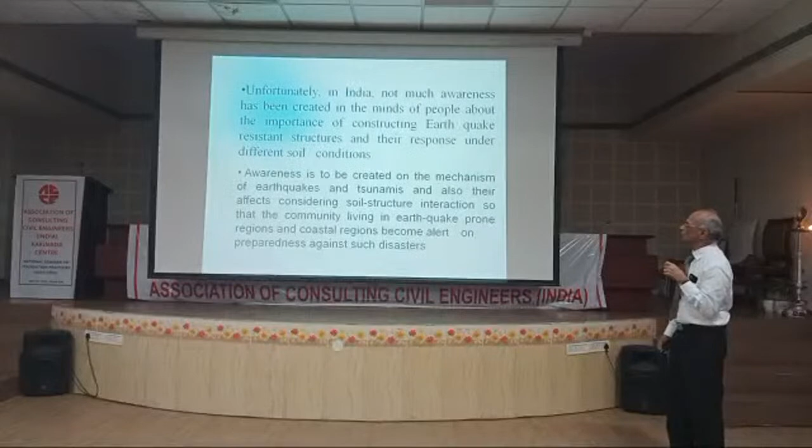Unfortunately, in India, not much awareness has been created among the minds of people regarding earthquake-resistant design, particularly for high-rise structures and important structures like school buildings, hospital buildings, reservoirs, dams, and flyovers. We have to consider these aspects also, and awareness is to be created on the mechanism of earthquakes.

Do you know, in Japan even school children know how to protect themselves during an earthquake - they go underneath a table automatically. That type of education is to be created among the people and public through seminars and workshops of this kind, so that the community living in earthquake-prone and coastal regions becomes alert and prepared against such disasters.

Probably you must be knowing we are in zone 3 - I will show the different zones of India also. Particularly our AP state, up to Visakhapatnam from Chennai, is in zone 3.

So quickly, what are the natural hazards - earthquakes, tornadoes, cyclones, and floods. Floods is another very important one. And fire, volcanoes, and landslides will happen, because during earthquakes there are coastal storms and tsunamis. Tsunami is a very dangerous natural hazard, and hurricanes - USA and other countries are facing these hurricanes.

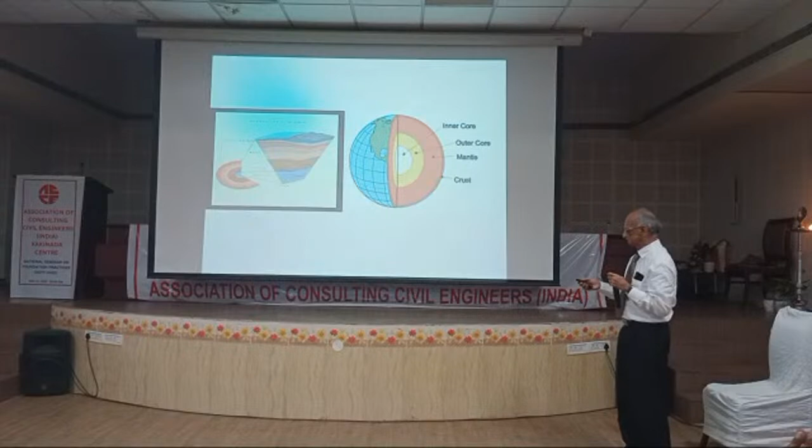So plate tectonic theory - this is very important. This is the reason for earthquakes and tsunamis. Plate tectonic means the earth has split into a number of plates. Number of plates, I will show you. And it's a fact also, you can see it in the Atlas also. Therefore, this plate tectonic theory explains several aspects of earthquake occurrences.

And this theory assumes that the outer shell can be divided into a number of rigid plates - the crust part has divided into a number of plates, I will show you that also. 225 million years ago, the Earth was a single mass known as Pangaea. Then 200 million years ago, it split into two parts - Gondwana and Laurasia. And the present day configuration is like South Europe, South America, North America, like that. So in future, the Earth will go on changing because it is splitting.

Normally, earthquake focus will be about 30 to 40 kilometers below the surface, and seismic waves travel. That's why I have taken the soil structure interaction. First, these seismic waves strike the foundation, then when they reach the ground, the earthquake interaction in particular is very important when you design against earthquakes or lateral forces like wind.

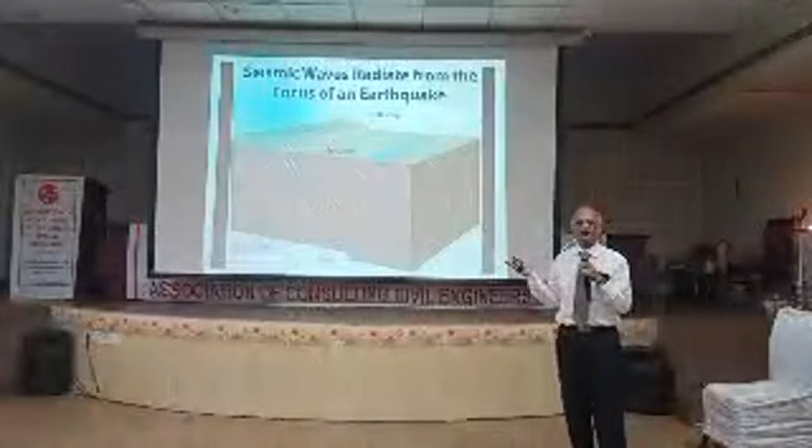So this is in fact the epicenter, magnitude, and also the source.

Now here the principle of modes of failure: normally for a shear wall, any wall, or even a frame, there are three types of modes. One is sliding, due to friction, the next is rocking, which means it rocks like this about the x-axis or z-axis, and bending, where the wall can bend.

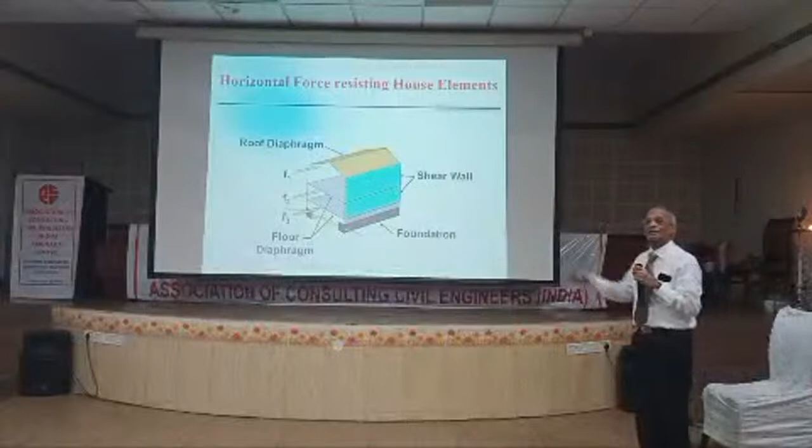Then normally which elements of the structure will be designed for lateral loads, wind or earthquake? Suppose the wind direction is like this, therefore the slab, the foundation, and the shear walls matter. That's why shear walls are parallel to the direction of the earthquake force or wind force.

And this is about earthquake philosophy. In earthquake classification, slight means up to magnitude 4.9, and many times we are facing minor earthquakes only. Recently in Ongole, Vijayawada also got 3 or something like this, a number of times. The moderate earthquake is 5.0 to 6.9, great earthquake is 7 to 7.9. India has faced a number of great earthquakes, particularly in North India, and very great earthquakes are above magnitude 8.

These are the IS codes related to particular seismic zones: IS 1893, latest code 2016, 4326, 13827, and 13920. Very very important codes for structural engineers. It explains about ductility effect, and IS 13935 deals with repairs and strengthening.

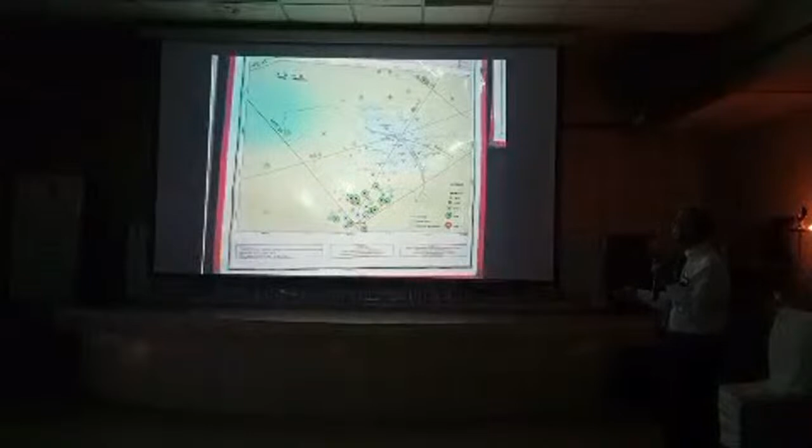Now, in fact, we have one research center at Gudlavalleru. By taking satellite imageries from NASA and from NRSA Hyderabad, we have developed some maps for the Krishna district and also Guntur district. At that time this area was announced as Amaravati, our capital area. We have studied that an earthquake of almost 3 to 4 magnitude occurred here a number of times.

Some minor cracks are also there. Cracks are there throughout India, and the majority of cracks are in northern India. There is also one important crack from Maharashtra to Ongole. That's why many minor earthquakes have occurred in this region.

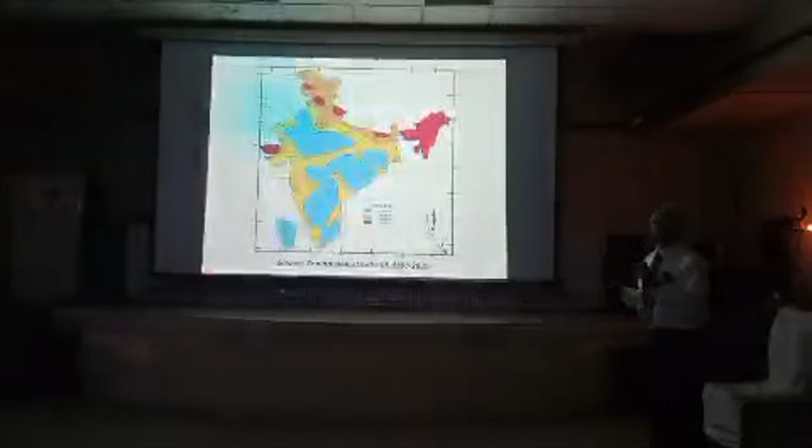In fact, I made a research survey for Hyderabad city. That also I will show you. So this is to understand...

...the seismic zones. The complete northern Himalaya range is zone 4 or zone 5, a very severe zone, and blue indicates zone 2, and particularly our AP is zone 3. As I said already, in IS code these maps are available, and you have to design the structures according to the zone in which the structure is located.

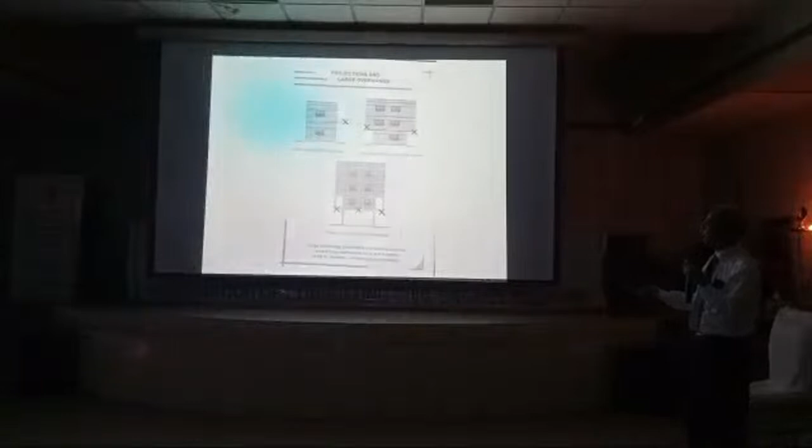So here also you can make a joint. These are all available in literature. Same thing - if you provide a balcony with openings, it is also prone to not just collapse or failure during lateral loads, but during earthquakes.

Now I come directly to soil structure interaction. Structure failures occur when not considering the soil structure interaction effect, structures which are not designed for soil structure interaction. Then I will take up a case study of Hyderabad.

Coming to soil structure interaction, there is a very important relation between structural engineer and geotechnical engineer. Without them, you cannot design any structure. Normally, the structural engineer is bothered about the structural configuration, allowable bearing capacity, its eccentric nature, and the foundation. That's what a structural engineer normally does.

Coming to geotechnical engineering, he will focus on inherent soil characteristics like C value, phi value, and N C, N Q, N gamma, their bearing capacity constants. And recommending the type of foundation, whether it is isolated, raft, or pile. So that is almost the duty of the structural and geotechnical engineer.

But here the dynamic relationship is where the response of soil influences the motion of structure, due to vertical loads or due to lateral loads. This relation always exists. Soil influences the motion of structure, and the response of structure influences the motion of the soil. This is a very important concept, called soil structure interaction. This is the definition of soil structure interaction.

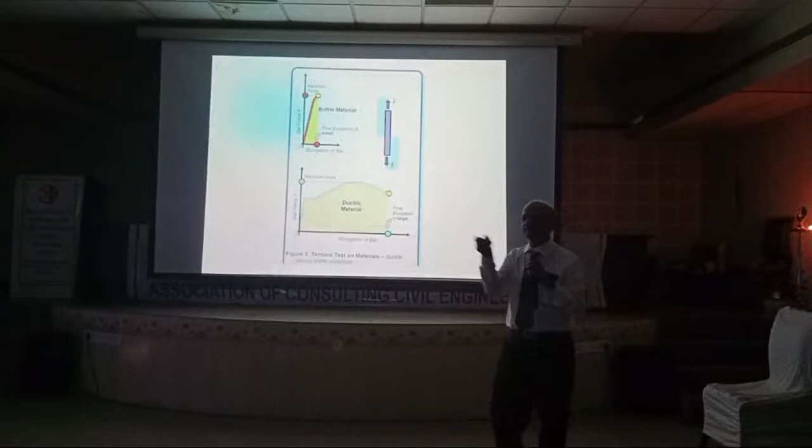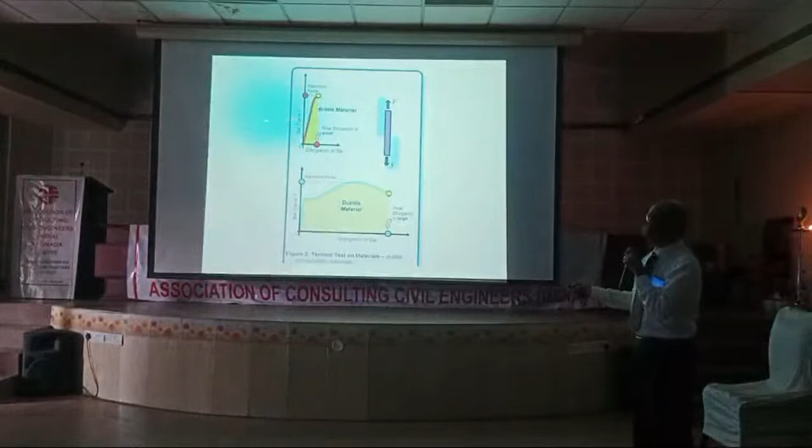So this is the force elongation curve. This is the force. Of course, the force may be large, but the deflections are very less in case of concrete or brick, which are nothing but brittle materials.

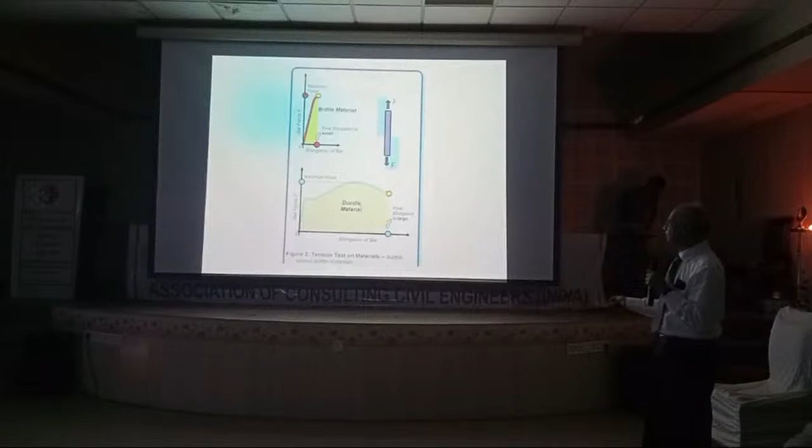Whereas if you take a steel rod, when you test it, it takes a long time, and a lot of elongation will occur before it fails. So it gives warning also. A brittle material never gives warning, it fails all of a sudden.

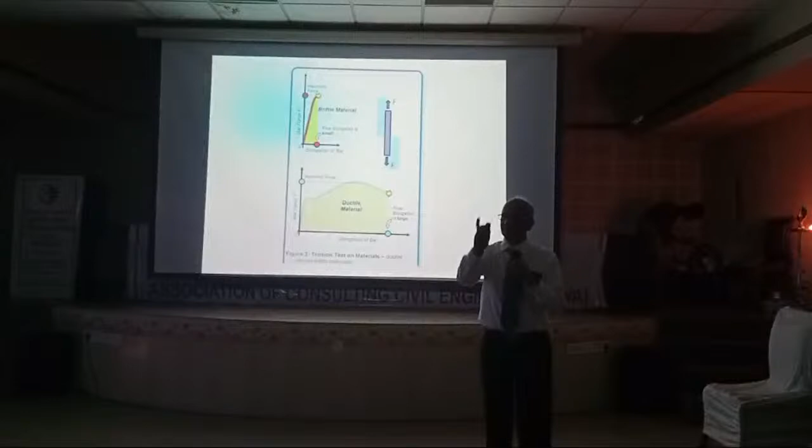That's why, particularly during lateral loads like earthquake or wind, you make the structure ductile in nature. It vibrates, but it will not collapse. If you don't maintain the joints, it lacks ductile nature. IS 13920 gives guidance on how to make a joint ductile. So this is a very, very important factor for the design.

Normally, high frequencies about 10 Hz and greater are dominant on rock or stiff soils. Higher frequency means more oscillations, and stiff soil means it oscillates more, so the time period is less. If it is on loose soil, displacements are very high and frequency is less, so below 5 Hz for loose soil.

The behavior of foundation on soil is modeled by foundation impedances, a very interesting phenomenon. We can adopt some springs, calculated by different equations presented by various authors, with spring constants and other parameters, making the structure a mass-spring-dashpot system. You can calculate the displacement, shears, moments, everything. These are soil springs for horizontal and vertical motion, and also torsion. I will show you some data.

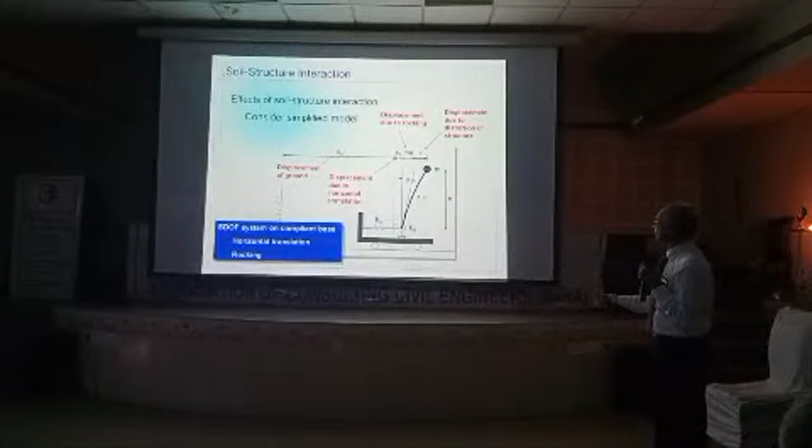This is a very interesting figure. Look here. During an earthquake, for example, this is the structure. First, the structure will shift - that is called free field motion, where the field itself shifts, called UG, the displacement of ground directly. This is the horizontal spring which gives horizontal displacement. Another is rocking displacement, and displacement due to the structure itself, which is called distortion of the structure. So you can see the total displacement of the structure.

So we consider soil structure interaction - in reality it happens like this. But what we often do is treat the structure as fixed to the base. Of course, for that condition also some displacements will be there. But during earthquake or wind, the displacements are very high, particularly for loose soils. This is only a single degree of freedom system. If it is a multi-story building, it becomes a multi-degree freedom system.

So we skip this. Yes, IS 1893 covers structures resting on flexible soil - it is mandatory even for field engineers because they have to follow IS codes.

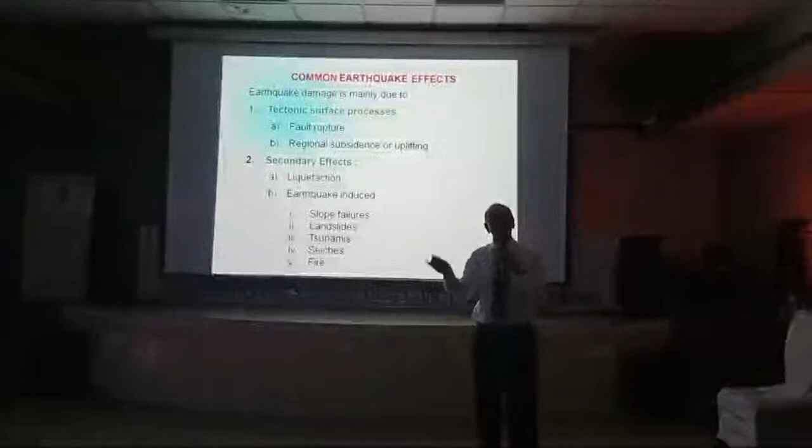Now, structure failures for not considering this - as I told you, let me quickly go through different cases. Particularly during earthquake, fault rupture occurs. Fault rupture during earthquake means some part of the earth will crack for some kilometers. They have almost gone into the soil, disappeared, as happened in Alaska during an earthquake.

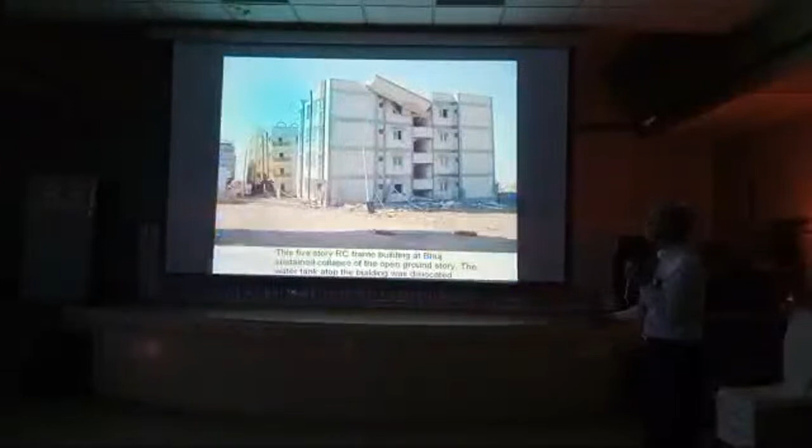This is again from a Gujarat earthquake example. A 5-story RC frame - how many stories are you looking at? Only 4. What about the 5th story? That is the car parking, and it has gone down. We have witnessed a number of such happenings in Hyderabad and in Kakinada also, and some other places. At Vijayawada, one water tank has fallen. So soil structure interaction has a lot of importance.

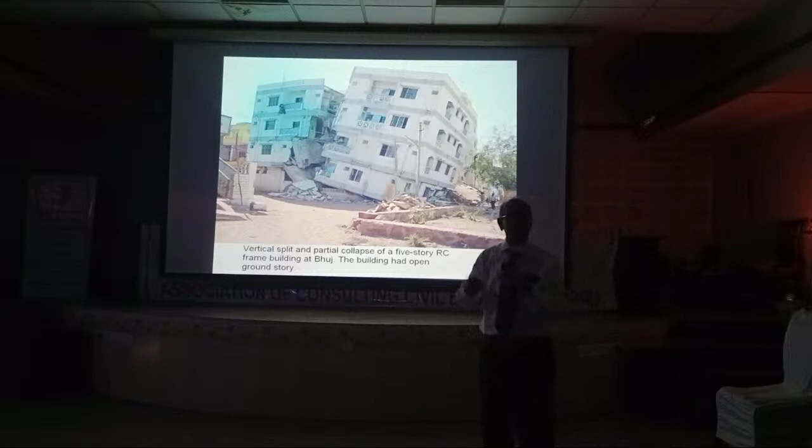This is pounding - side by side, they construct buildings violating municipality rules or so. Let me explain this simple thing for at least 2 to 3 minutes.

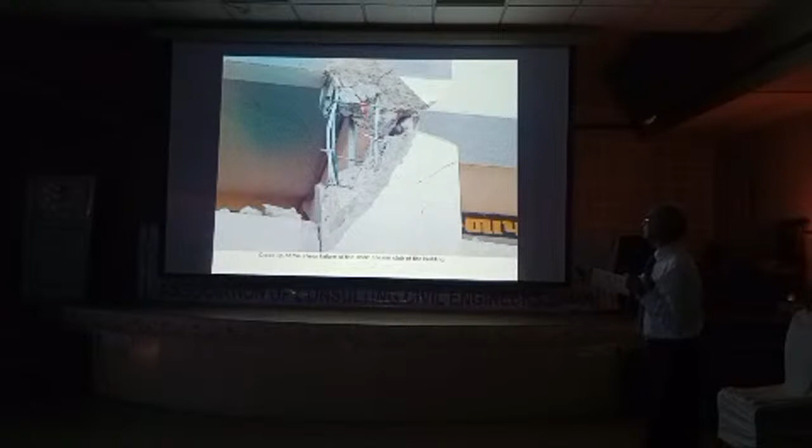Now during an earthquake, one tie has broken. See, this tie, how much cost would it be? One tie, 6mm or 8mm rod, maybe 100 rupees. But because of this, the entire structure has collapsed. Therefore, due to lateral loads, the columns act as beams - lateral load means they act as beams. Therefore, these ties become stirrups. Normally, we call stirrups in beams for flexure or shear. Now, columns will also take shear during lateral loads. Therefore, it has broken. What will happen? The spacing becomes double, and when it becomes double, buckling has taken place.

So, a number of buildings in Ahmedabad failed because of this. Therefore, columns in the cellar floor in particular, we should be very careful. At least for every 10 centimeters, we have to provide stirrups. See, buckling of longitudinal bars happens because of this buckling.

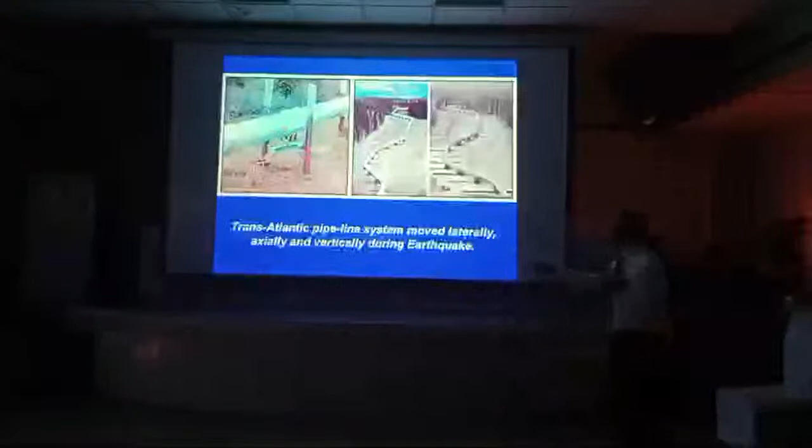This is the Trans-Atlantic pipeline, very important, like the ONGC pipeline. If the joint fails, what will happen? A lot of actions will take place. The original pipe displays effects not only horizontally but also vertically. So jointing the pipelines is also very important.

Now you can see the flyover bridge, how it has collapsed. You can see it has fallen totally. This happened between the Philippine plate and the Eurasian plate.

Such videos, a number of them, are with me, but due to lack of time, now a case study on responsive structures concerning SSI. This is the theoretical study, and I also explained some equations which are available now to calculate the displacements, shears, and moments.

Major metropolitan cities in the world have registered enormous growth in population. Most of the people are migrating to cities, all of you know, right? One of such cities is earlier Hyderabad, now it is Vizag, Kakinada, and the like. Unfortunately, in developing countries, not much awareness has been created in the minds of people about the importance of constructing earthquake-resistant or tsunami-resistant structures. The main objective of our study is to ascertain various aspects of terrain associated with urban environment and to consider these aspects in dynamic analysis.

Suppose you take Kakinada city. First, you have to make a survey and develop a soil map showing where loose soils are, where rocky soils are, where gravelly soils are, because there are so many types of soils. So first you develop a city map, which is also known as microzonation. This is very important because the structure designed in a rocky area is totally different from a similar structure on soil.

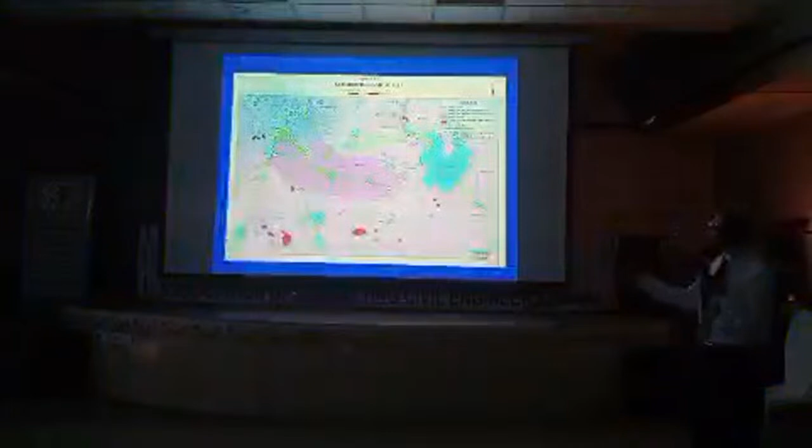So this is the geomorphology map, you can see. That means you take some satellite survey and identify the type of soil where you are going to build a major dam or building.

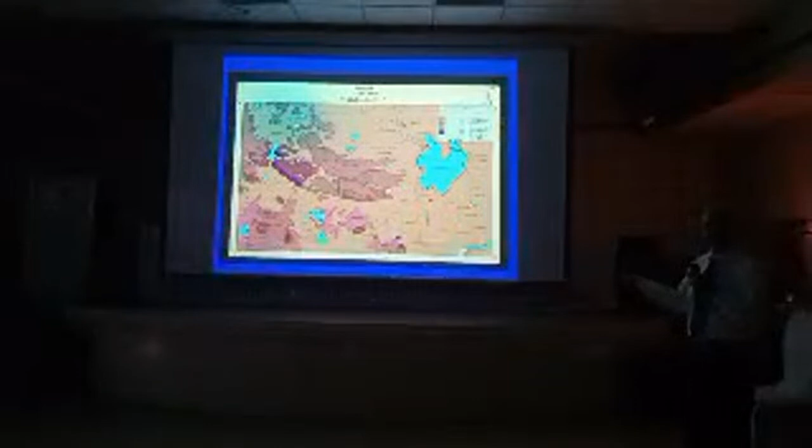So this is the slope map of the city, showing from top to bottom how to maintain the drainage system. Nowadays, what will happen? You start the drainage in one state, but in another state it is above that level, so such problems will arise. Therefore, you have to take the slope map of the city or town.

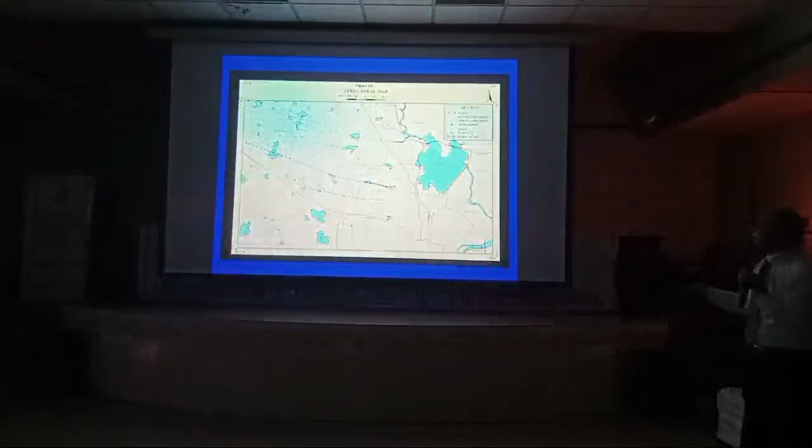So one can design only for dead loads and live loads like that. We have the frame, and using the Kani's method or stiffness method or software, we can calculate the moments and shears. But how do we consider the soil-structure interaction?

Now what I have done, I made it a single degree of freedom system. By philosophy, if it is in series, 1 by k equivalent equals 1 by k1 plus 1 by k2 plus 1 by k3, and so on, you get the equivalent stiffness. So I made it a single degree of freedom.

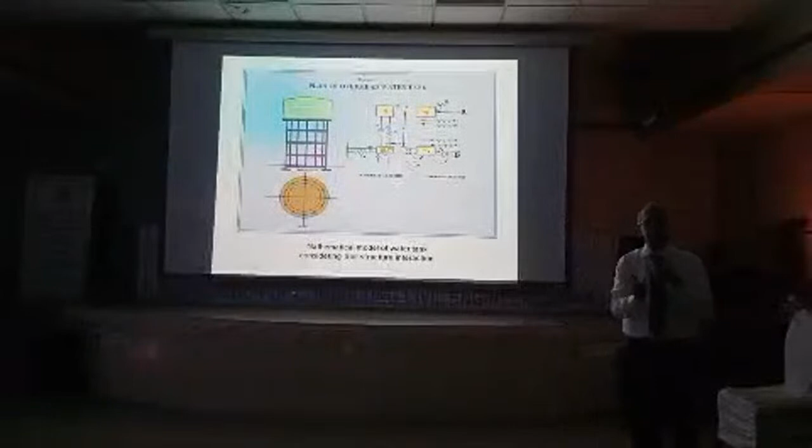So this is the water tank. I have already calculated the mass, top mass, and also stiffness of the structure. Now the soil is represented by springs: a horizontal spring to get horizontal displacement, and a rocking spring to get rocking displacement. And if torsionally there is no eccentricity, here it becomes a single degree of freedom system, and here it becomes a 3-degree system because there are 3 springs.

What is the degree of freedom? The number of possible displacements.

So how do we analyze it? This F is the inertia force - all of you know what inertia is, mass into acceleration. This is the damping force, C into x dot. This K into x is the restoring force due to the structure.

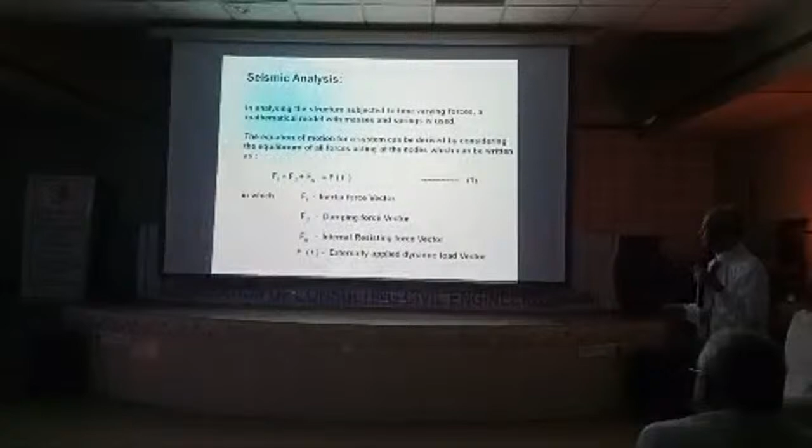Therefore, this is the matrix formulation. All of you know force equals mass into acceleration. Similarly, damping equals C into x dot - the research scholars and other faculty know this pretty well. And this K into x is the restoring force matrix. So in matrix form, we can write m x-double-dot plus C x-dot plus K x equal to external force, earthquake or wind, whatever. So you get the time period or frequency by putting it equal to 0.

So the time period you get without applying any external force. Any structure will have its own time period, its own frequencies, depending upon the stiffness and mass. Using this, you can calculate the time period, and keeping track of the time period is very important, particularly for lateral loads.

Now coming to soil structure interaction. Soil response depends upon soil properties like unit weight and shear wave velocity. Shear wave velocity is a very dangerous parameter. Normally in loose soils it is very low, and in rock it is very high. For example, in black cotton soil, its value is only 60 meters per second.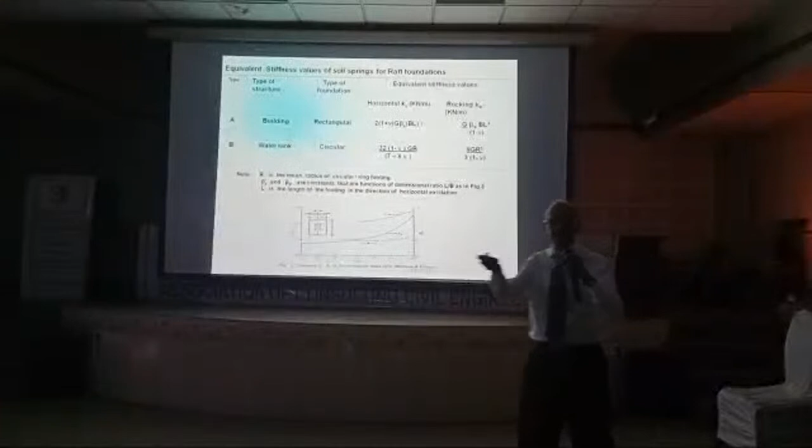Now this is very important. Suppose if the foundation is an isolated rectangular footing, this beta x we can obtain from this graph, and like that we calculated horizontal and rocking stiffness.

Now stiffness in case of piles - that is also translation, vertical displacement. These are the equations available. EP is the Young's modulus of pile concrete, area of cross section, R is the radius of the pile, and FV1 and FV2 are normal coefficients which are already available.

So these are the coefficients that are available - normal coefficients, depending upon Poisson's ratio and also E pile by G pile, that is Young's modulus by shear modulus value. You can pick up the appropriate value and get the stiffness of piles also in horizontal mode and rotary mode. These are the equations we can formulate.

Now the 3x3 matrix - I have formulated mass matrix, look here. This is acceleration, this is the stiffness matrix. So m times x double dot plus k times x equals 0, I get the frequencies. So I got the frequencies.

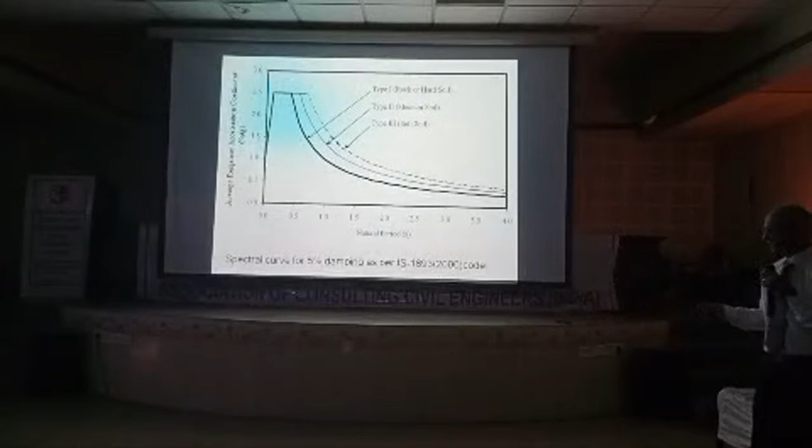Now this is the already available spectral curve depending upon the time period. I calculate the SA by G values from which I calculate the base shear directly. Using the free vibration analysis, I can calculate these results for the building as well as the water tank.

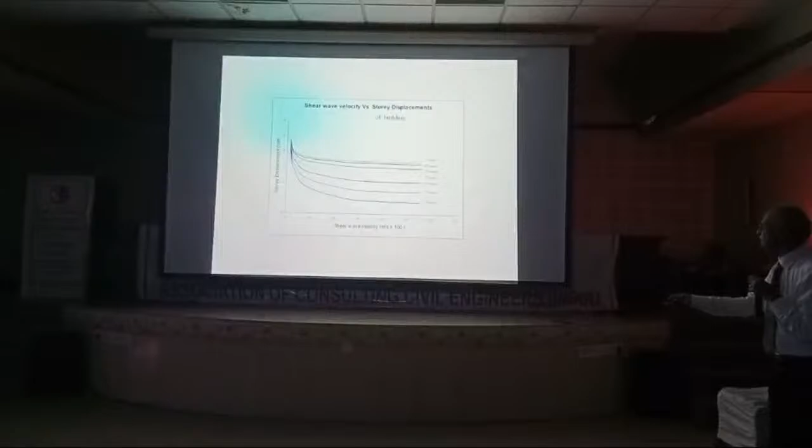I will show you the displacement - that is interesting. So story displacements, you can see depending upon the story, the displacements for different soils. In loose soils, the base shear transfers differently. So generally it is seen that the displacement values increase with the decrease of shear wave velocity. This is an important point I would like to highlight.

It is also observed that there is a wide variation and decrease of displacements from loose soil to hard soil. So in loose soil, both the structure as well as the water tank show very high displacements.

In spite of many scientific and technological advancements during the past 100 years, the threat of natural disasters, particularly earthquakes, tsunamis and wind storms, remains untamed. History, geological evidence and experience show that the rate of occurrence of these natural hazards will increase in future, as is well established globally. Earthquake-prone societies have to learn how to live with earthquakes.

Japanese people know how to live with earthquakes. We need to make society safer against seismic damage and construct buildings properly, particularly in coastal regions. Megacities, due to their sheer size and complexity and being situated in high seismic regions - for example Mumbai, Ahmedabad and New Delhi - are seismic regions. Therefore, unless we take care, we don't know what will happen in future.

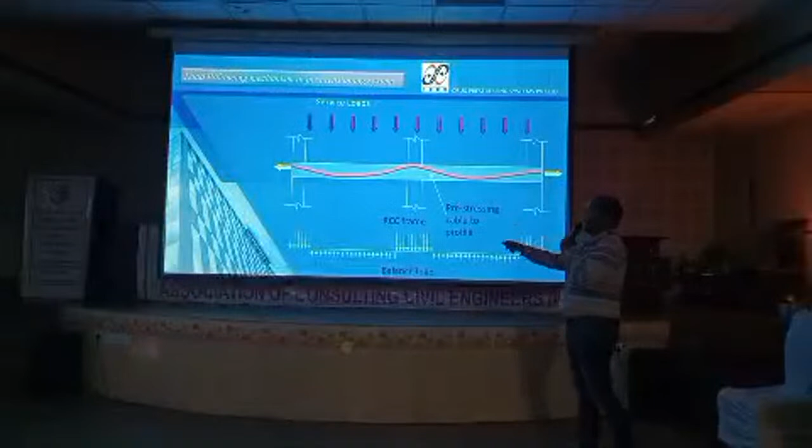In the post-tensioning system there are two methods: the bonded post-tensioning system and the unbonded post-tensioning system. Our organization works on the bonded post-tensioning system. In the bonded system, the pre-stressing reinforcement is completely bonded with the concrete through grout, whereas in the unbonded system, the pre-stressing reinforcement is not bonded with concrete. In the bonded system, the tendons are not free to move with respect to the concrete, whereas in the unbonded system, the post-tensioning tendons are permanently free to move relative to the concrete between the anchorages.

The merits of the bonded system over the unbonded system.

The bonded system critically does not depend on the anchorage after grouting is done, whereas in an unbonded system, the anchorage failing can cause issues. In unbonded systems, there is a chance of failure at the wedges, that is the end anchorage, and that damage we cannot find. Whereas in a bonded system, it is completely grouted with concrete, so even if the end anchorage fails, it is not a problem to the structure.

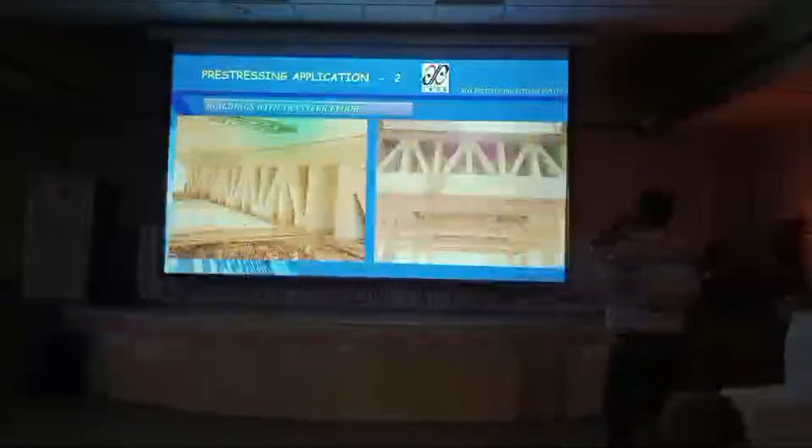These are the materials used in the bonded post-tensioning system: the strand and the tendon. Usually strands are available in 0.5 inch and 0.6 inch diameter. The strand is made up of 7 wires bundled in a strand form.

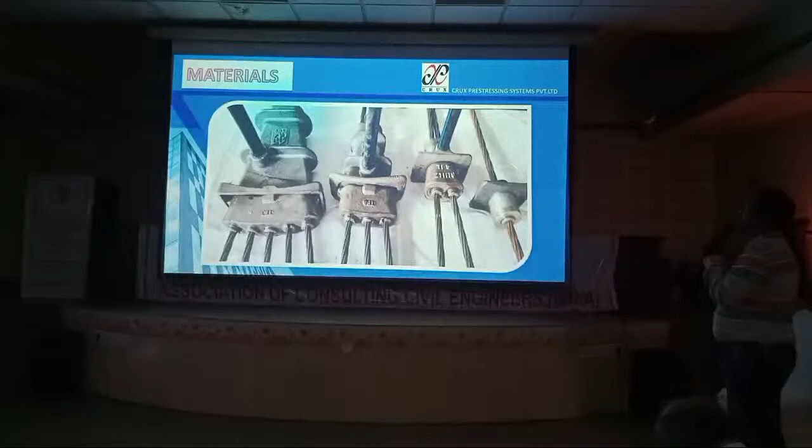There are different types of tendons. This one is a multi-strand tendon, used for higher strand counts and higher loading conditions, so we go for multi-strand tendon. This is a rounded duct used for the tendon. This is the monostrand stressing machine, used for stressing in the post-tensioning design.

The structural elements are thinner compared to the conventional system, which gives more head clearance to the structure and is also neat and simple. For spans higher than 10 meters, we have the beam-slab system with major beams and secondary beams, and if we go with centering and reinforcing everything, it will take more time.

Whereas for such spans, we can go for a flat slab system. It may be a flat plate system or a banded system. It is very simple, easy, and neat, and improves speed of construction. As discussed earlier, the structural element thicknesses are very less, and consumption of reinforcement and concrete is less compared to the conventional system, which increases the speed of construction.

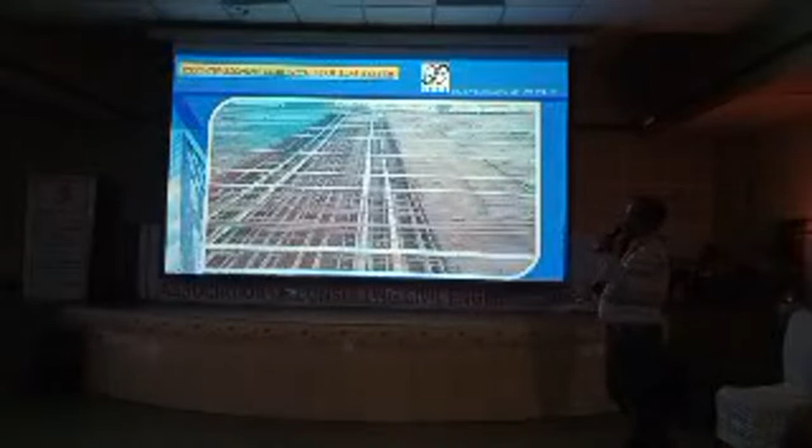This is a typical example for transfer floor, done at Vizag for the Abram project. This building is a mixed development where the first 3 floors are for commercial purpose and the next floors are for residential purpose. We floated the residential floor level, and this was done for 11 floors. We transferred the structure for 11 floors. These are some of the projects we have done from Crux.

This is a hotel floor. We floated this structure for 20 floors. The other commercial projects have no floating.

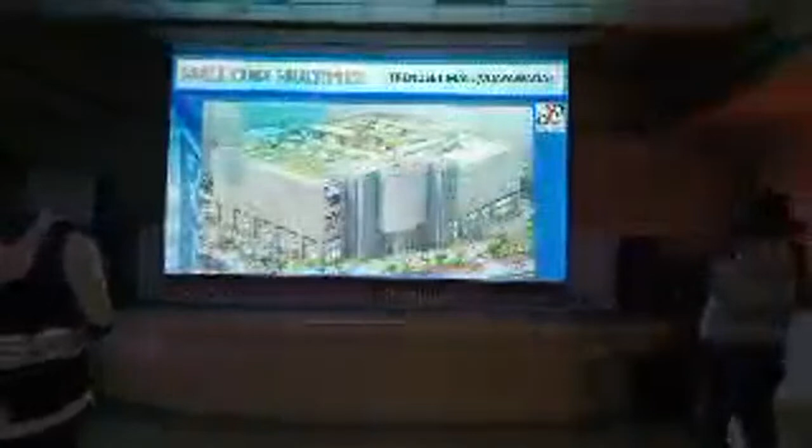And these are some of the multiplexes we have done from the crux. In Vijayawada, these are the multiplex and Vijayawada Trendset, and this one is Centri at Vijayawada, CMR at Ellore. These are the multiplexes - Phoenix at Guntur, having a 12 by 13 meter span.

This is between here and Godavari, very nearby, 27 kilometers from here, and this is the alignment. I will show you one more interesting thing. I had worked on the investigation of this bridge earlier, so we were using all those compasses, EDMs, rusted theodolites, leveling instruments, plane tables, and all those things. We thought whatever we had planned was a correct crossing.

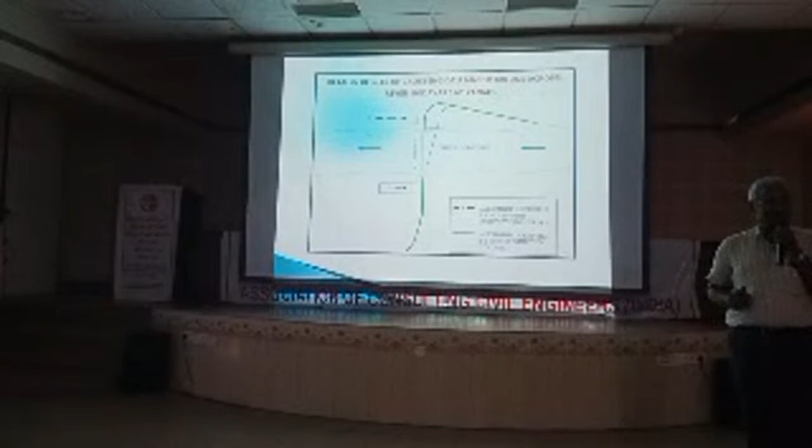So this is the normal crossing. We originally gave this plan, thinking that it was the correct crossing, right? When the work was awarded, Navayuga Engineering came into the picture. They used total station and everything, used the same peg marking, and we found a difference of 120 meters. Imagine, had we constructed the bridge on our own alignment, the construction of this bridge would have been far more than normal.

So this is about selection of foundations, where selection of foundation is a very important thing, and nowadays nobody is going for wells, everybody is going for pile foundations. And again, as I said earlier, it's site dependent and also structure dependent.

We had a very bad experience with well foundations at two major bridges here. One well shifted around 2.5 meters away from the center line, and ultimately it was abandoned. So we went for piles all around the well, took a pile cap, and kept our substructure exactly in the physical center of the alignment. So well foundations have nowadays become obsolete. Still, I don't know, railways are using them, like the Kotipalli railway line, where they are using well foundations up to minus 52. Imagine the effort they have to put in, and I don't know how they control tilt and shift of that well.

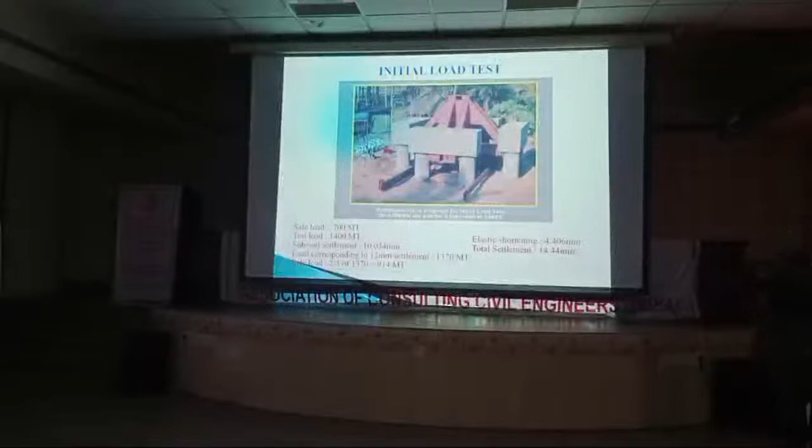And this is what I was talking about. There are two types of tests: one is direct loading, another is reaction loading. You can apply reaction because, see, 2 times this 700 tons, around test load of 1400 tons we have to create. It's humanly impossible to keep 1400 tons on a pile.

So we create an all-round pile for reaction loading. It's very simple, it's Newton's third law. Whenever you pull up, actually you use the rods, it pulls up, then it will be restrained on the four sides. Automatically the reaction comes to the pile. That's a very simple thing.

I think one important thing here is settlement, which is the elastic shortening of the pile. Do you know concrete gets shortened when you apply too much load? Sometimes it bounces back and sometimes it behaves plastically, by designing the substructure as well as the superstructure where sufficient bearing thickness, allowance for the bearing thickness, has to be given. Otherwise, again the deck will be affected, you will have a rocked deck.

So this is the total settlement. Here is a corresponding settlement at 12 mm, it's 1370. A safe load is only 914 tons, which is more than the design load.

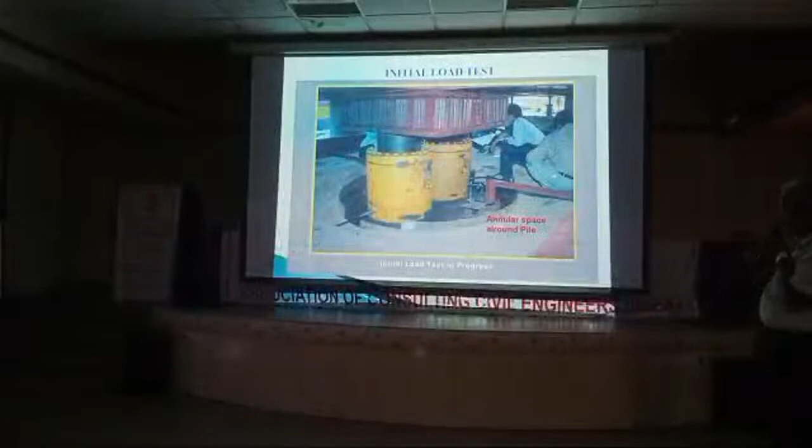Yeah, see, this is one important initial load testing, and this is a 1.7 meter diameter pile. And interestingly, you see this annular gap, the pile is here, the casing is here, there is a gap between the pile and the casing.

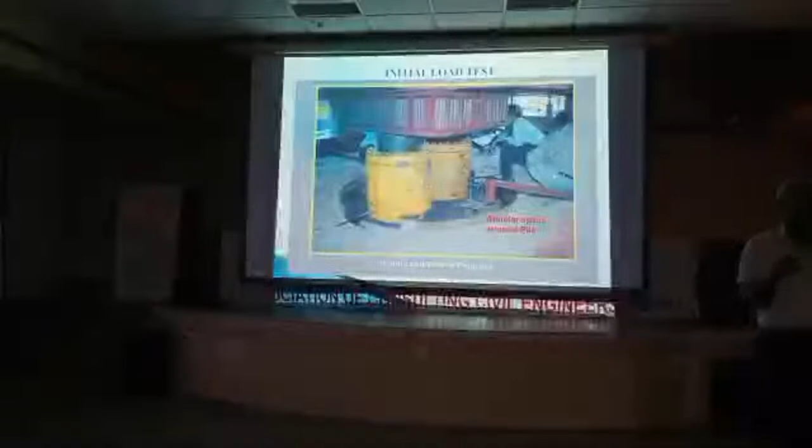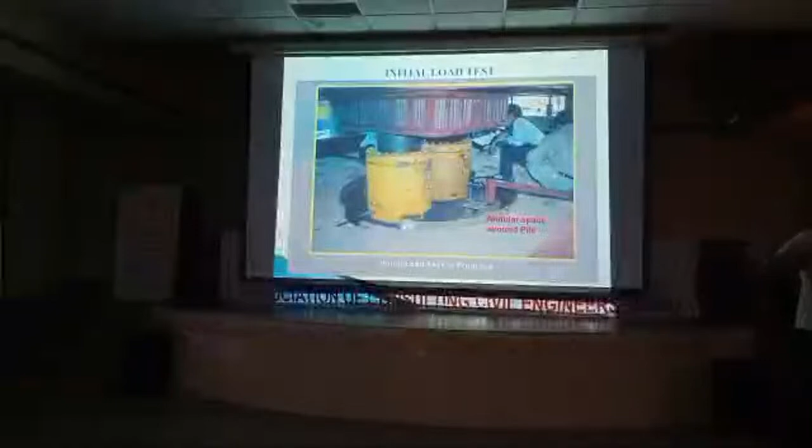Why? Because we are simulating the scour. In case of scouring, if everything is washed off, the pile should not take any load by virtue of its friction with the existing soil. So we have gone for a 12 mm thick casing up to the maximum scour level and then applied the loads. That is replicating the exact design.

And you see, imagine these two jacks, you have to get very heavy duty cranes to place them there. Very, very meticulous work.

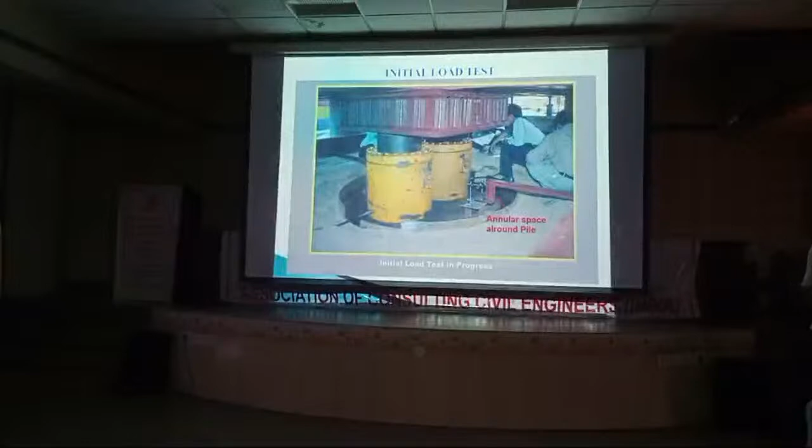Two? No, one pile only. One pile, yeah.

This is a rig first imported from Germany by the contractors. They used this rig for the 1.7 meter diameter pile.

Yeah, I think everybody should understand how a pile will be placed in a water body. In a river, how do you place a pile? Whenever a water depth of 8 to 10 meters is there, how do you place your pile?

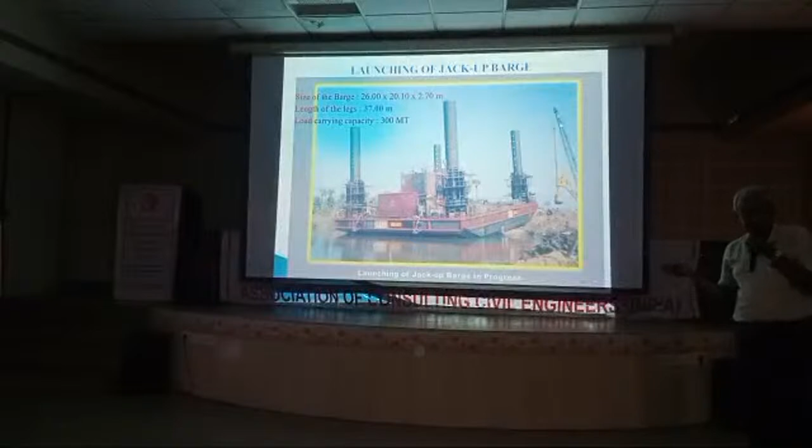This is the arrangement, this is a barge, and these are the legs, and it can take up to 300 tons of the pile load. So it will go to the location, and all these legs, see, it has gone to the position, and all these legs will be lowered, so it will touch the bed, and everything will be locked.

And using the ETS, the locations will be finalized for all the piles, and the rig, earlier I have shown you, this is the rig mounted on the barge. It will go to the place and start drilling.

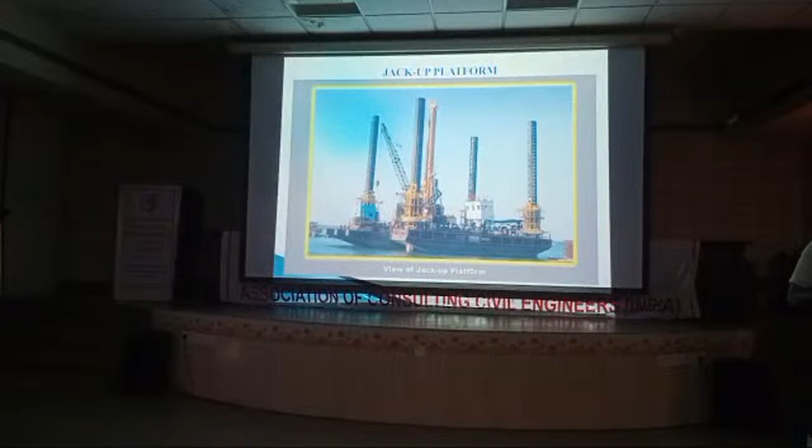And with all this, this is how these casings are being driven inside the subsoil, in the underground.

And this is for driving the liner. Liner is another thing—now they have used a gigantic liner.

Recently we have submitted designs for a bridge at Narsapuram, with a span of around 42 meters. Why 42 and not 50? Because of inland waterways requirement—they wanted a minimum of 42 meters, so we followed that. If you go beyond 42, casting beds and launching of the decks will be very difficult. As per the Morth design, you need a 12.9 meter outer-to-outer deck, so you will have 5 girders. These 5 girders have to be cast on the approach and then transferred and launched onto the piers. So there is a length restriction, and we reduced the length to 42 meters only.

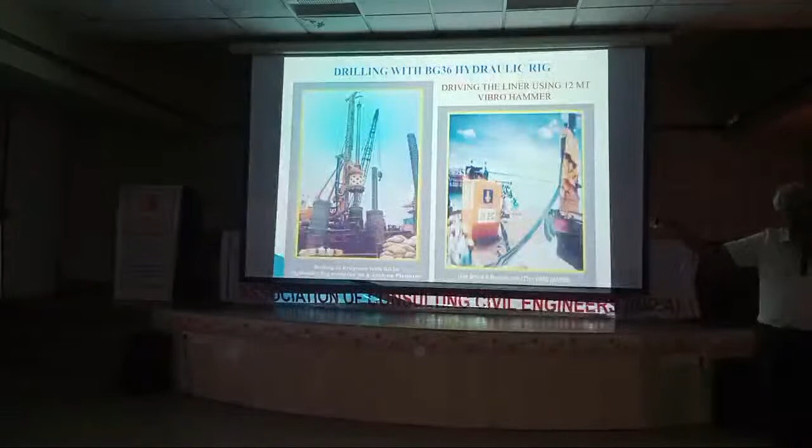There the question of lining came up. As per the latest IRC code, whenever there is proximity to saline atmosphere or saline water—there's a backwater effect here from Antarvedi, and in Annam too there's a backwater effect—you have to provide a casing up to the full depth.

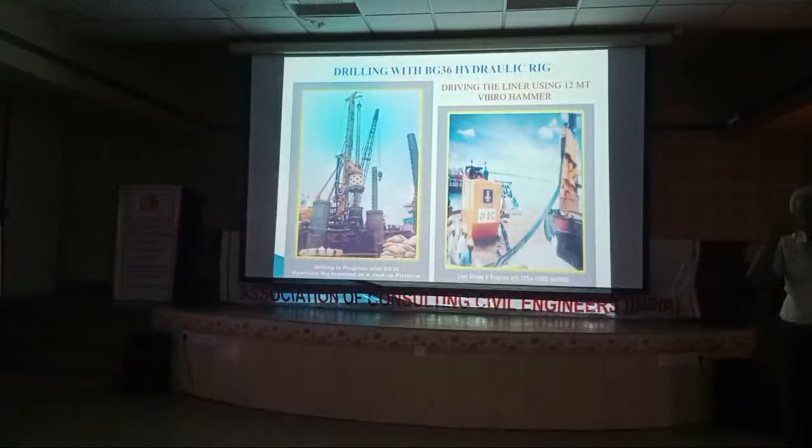Then what happens to the friction? It's not zero—actually the code is silent on that. The code never said that when the pile is sunk with a casing to full depth you should consider this friction versus that friction. But we have used a friction factor of 0.25 as per the code. Let's not get into that further—we have designed it, and these designs are approved also.

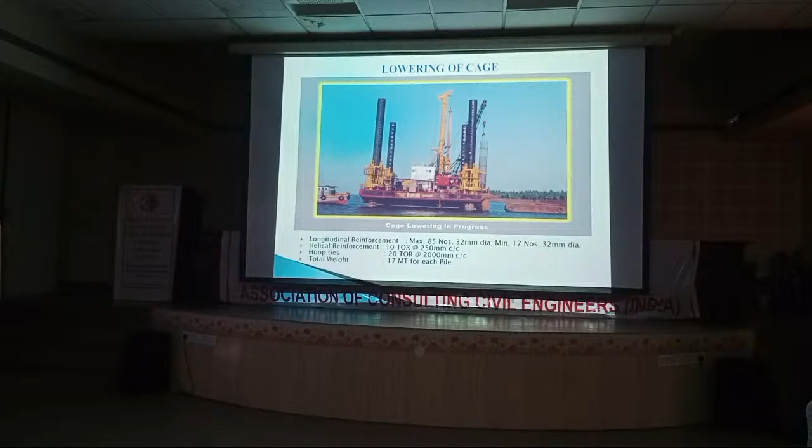Next slide. Yeah, this is the lowering of the cage, around 17 tons each—80 to 85 numbers of 32 mm diameter bars. And this is concreting in progress.

And this is another thing—routine test. 2% of the working piles have to be tested. We compared the same reaction loading and conducted the test. At the place where the test was conducted, the water depth is 8.5 meters.

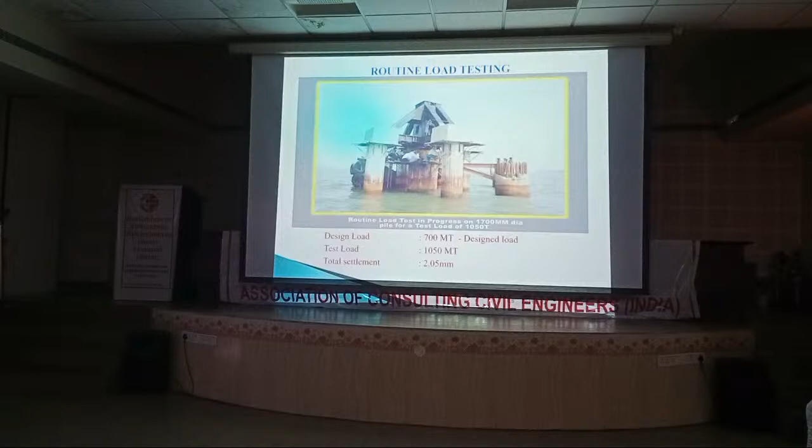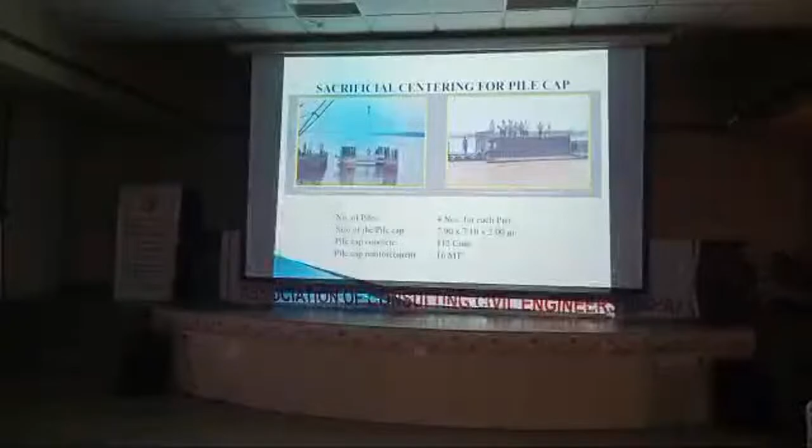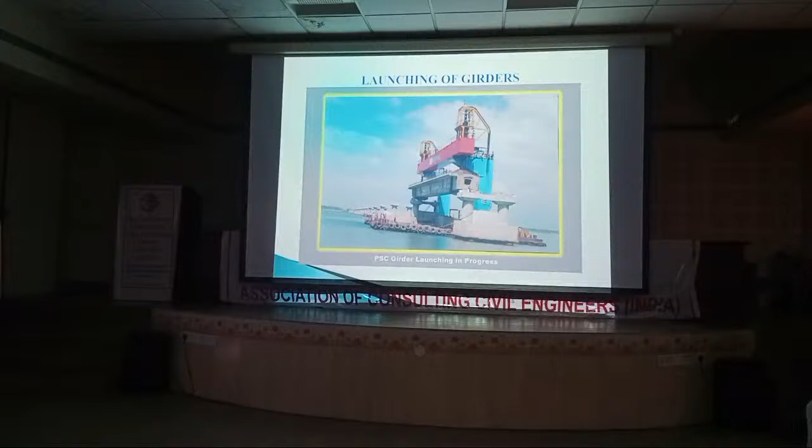Anybody who happens to visit a site like this, taking a thick plate, they cut the plate into the chain shape and used it. These are the parts, and these are coming—this is called stitching. When the two girders are launched, the gap between them is filled with stitch concrete, placed without any centering from the bottom; that will be done only from the top.

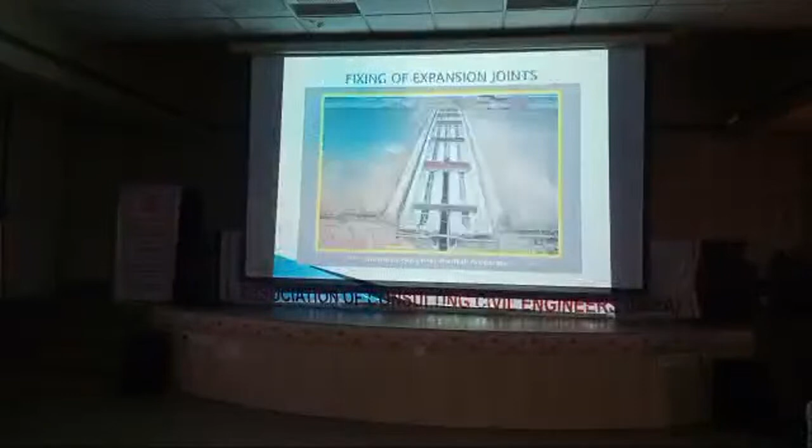So now I will go to a failure story. We tasted success there, and now we are going for the failure thing.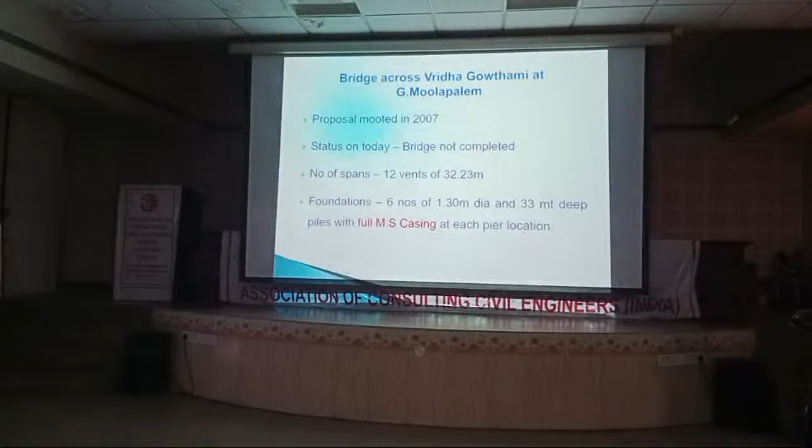The proposal was in 2007, with spans of 12 lengths of 32.23 meters, foundation piles of 1.3 meter diameter, 33 meters deep—just see this, 33 meters deep—with full MS casing. As I said, in a saline atmosphere we need full depth excavation casing. The design load is small because it's a box-type girder, so loads manifested will be very less—so it is 250 tons, and the load applied, reaction, everything is as per theory.

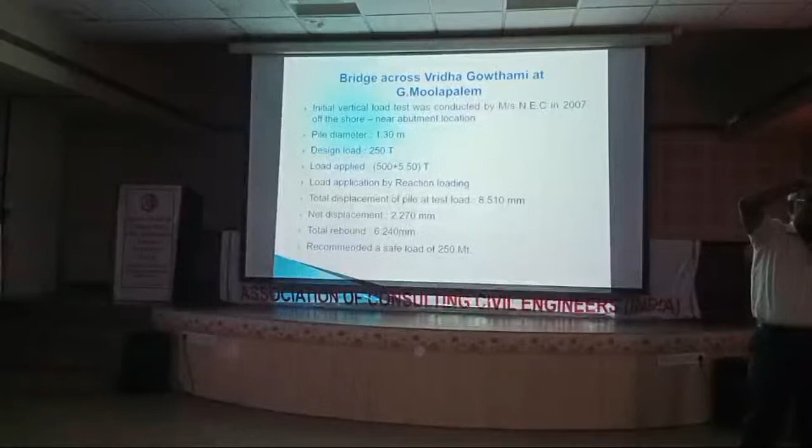So by the time the engineering company was doing that bridge, we asked them to conduct the soil test at this place also. They conducted the initial load test and gave us 250 tons as the safe load—just remember, 250 tons.

Here it is. The prudence behind this is really boggling us today. The work is not completed.

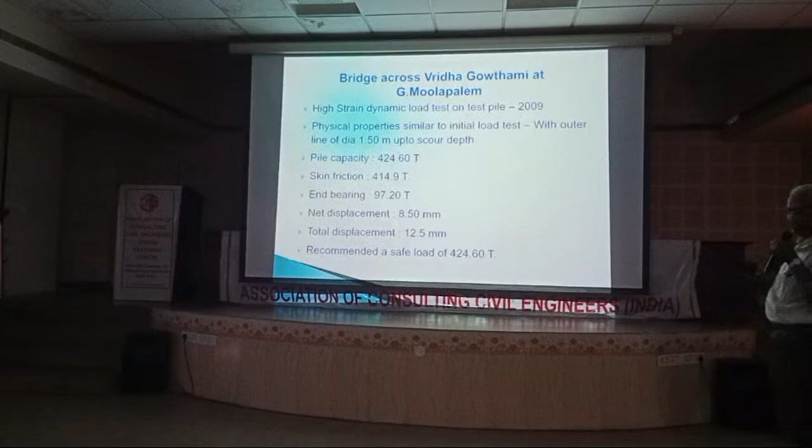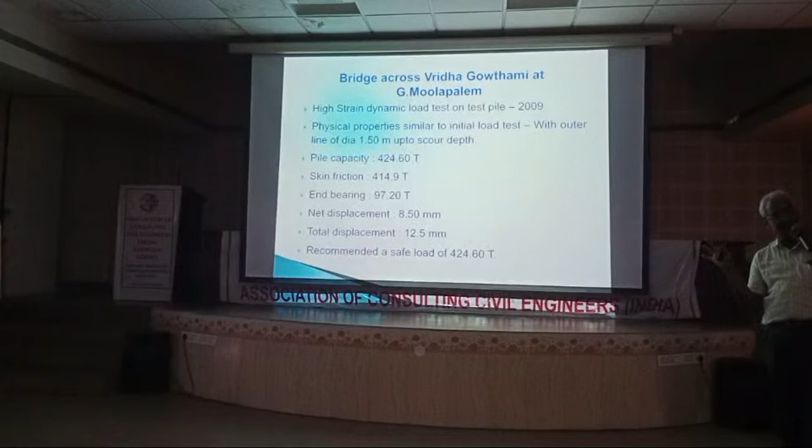First, high-strain dynamic load test was conducted in 2009. They gave 424 tons. Around 5 to 6 times we had conducted the load testing, and each time it gave a different result.

The new contractor is so calculated, a perfect contractor. He gave us the Kentledge calculations, what he is going to do, and all those things in a schematic manner. This is how he wants to place all the concrete blocks for the loading.

This is how we calculate it. Each layer, how much load is coming onto that, including all these things like a bucket. There will be one called a stool or bucket, it will be here, including all that. Even if you stand, we have now taken your weight also.

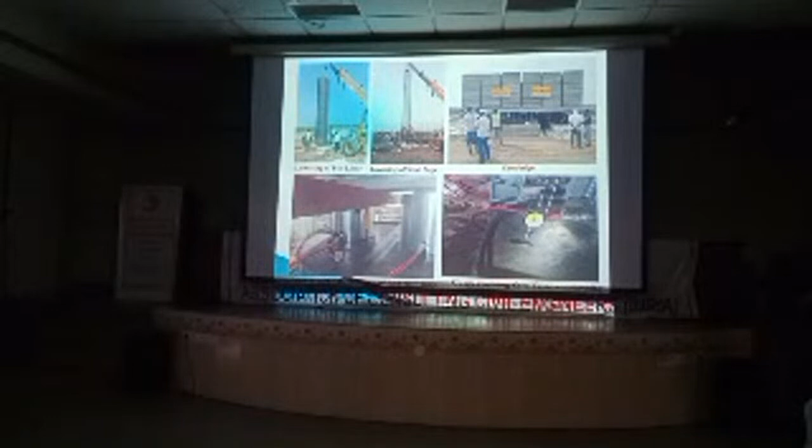The test was conducted. This is overall how we have it. Earlier we had suffered settlement due to the poor outside subsoil, so he made all these arrangements with sand filling etc., so that it did not settle even prior to applying the loading. Then he applied the loading.

You know at what load it failed? It's only 28.4 tons. It failed at 28.4 tons, against a requirement of 250. What was the result given by the contractor? That it is sufficient at 250, and the third test it settled without applying the load. The fourth came to 179, and the fifth came to 28.4.

So we had no clue why it was happening.

And the present situation of the bridge is this: 2007, and we are now into 2022. 15 years had lapsed, and 7 crores was spent on that.

Forensic studies, soil resistivity testing we have conducted, Andhra University people came there, and this is the soil profile we matched. We wanted to know what soil is available at what depths. Everything is good, even this is good.

The top deck is RCC deck, and the bottom is rail deck. The top concrete deck is composite, with shear connectors on top of that, which I'll show you.

The deck is supported on a steel truss. Each slab is 6.7 meters because every secondary joint is 6.7 meters, along the traffic direction. In the flow direction, we have two unsupported spans of 2.5 meters each, which I'll also show you.

See the design beauty of it. It was left intentionally unconnected, to cater to everything. Otherwise, the bridge would have uplifted at the joints itself, causing recurrence of vibrations inducing cracks, rendering repair work necessary. We tried a number of solutions, but all these repair works became redundant.

Suppose if you use micro concrete, we need some curing time for settlement. But even when we lay the concrete, as soon as a train goes on the bottom deck, that's all gone. Micro cracks were formed in the concrete, and later it all became useless. You'd need to work only at night, when there are no trains on the lower deck, but who will come for that at night?

And this is the crocodile joint, placed over the piers only. That is about a 91 meter span. And this is the instrumentation scheme done by SERC - not of much relevance to you.

This is a cross girder, transverse girder. This girder is in the flow direction. This is one transverse girder, another transverse girder is there at 6.7 meters. And these are the longitudinal girders, and these are the concrete slabs.

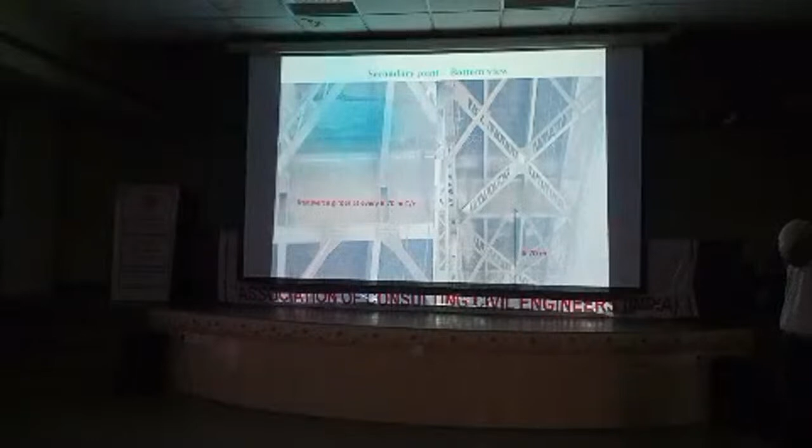You were asking about the 6.7 meter interval - in the truss itself there are so many members. Between the two vertical members, the spacing is 6.7 meters, so directly we cut our slab there. But why, in the deck, at 6.7 meter intervals, have they put a joint there? They should have a continuous deck, no?

There is a design approved by RDSO. Why are you asking - instead you could have a continuous slab instead of this. I mean, for 91 meters, I have designed such kind of bridges, even 120 meters I have done, but I never designed like this.

Maybe this was the technology provided in 1964 - it was awarded in 1964, though design might have taken place even prior to that, in the 1960s. So, this is the 2.5 meters, 2.5 meters, secondary joints are there.

And this CC haunch is there, no - you are asking about the shear connectors. We have the shear connector welded to the cross girders, over which the concrete has gone. The shear connector is on the cross girder, right? No, even the longitudinal girders also have them.

I think I am clear up to this. This is a longitudinal girder going along the traffic direction and meeting the transverse girder. This is fixed, you see - at one end it is fixed.

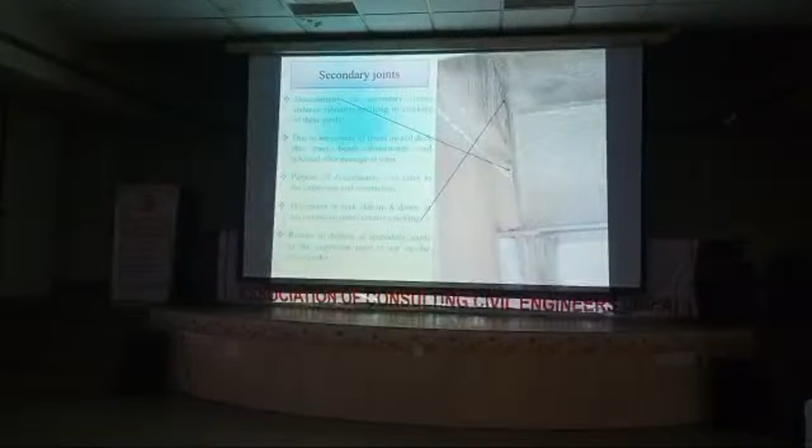And the secondary joint - this is the culprit. When it comes to the other point, there is a gap. SERC's observation is that this is theoretical.

Another problem is the free vibration generated by vehicle movement doesn't decay fast - that is the most culprit number one, it does not decay fast. So before the vehicle moves, the SERC people kept two vehicles fully loaded.

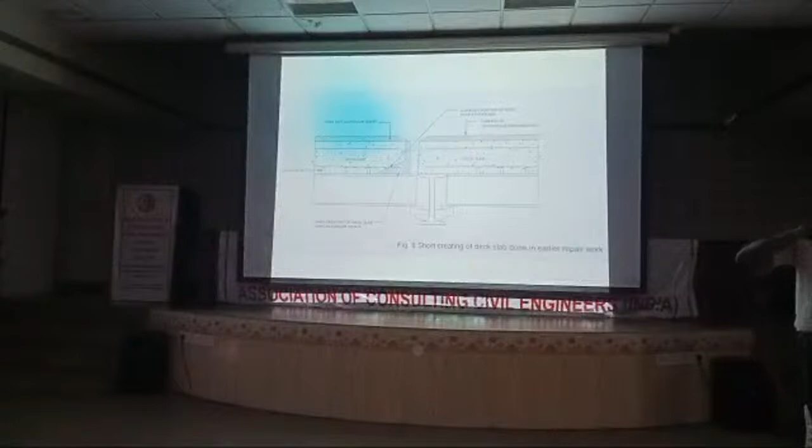Whenever vehicles are passing, they move like that. And when the vehicle passing is coupled with the train movement, it moves the other way. As a result, it is pushing up the secondary joint on top and slowly forming humps on the secondary joints.

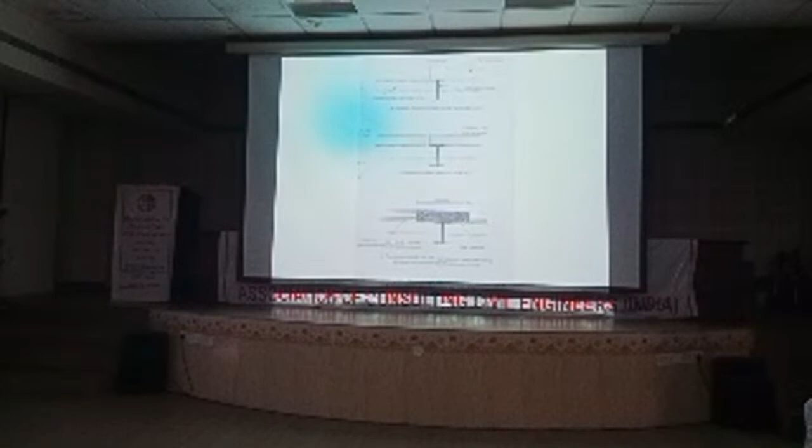This was the solution we had done. We wanted to put blind plates and one top plate and all those things, but it's all impractical.

Even for this, we had to spend 6.5 crores. After that, we removed all the top layers of bitumen in 2015 Pushkaram.

For that, we have a small questionnaire. Distinguish between brittleness and ductility. What is the difference between brittleness and ductility? If no students are answering, any engineer can answer this.

Sir, you are not allowed, sir. In what context generally do we use this?